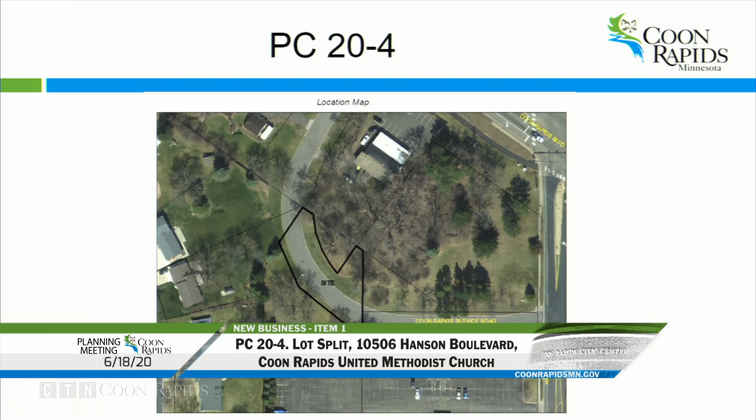Good evening, Chair and Commissioners. This is a request by the United Methodist Church for a lot split. This is the property here, highlighted or outlined in black. This is the service road for Coon Rapids Boulevard. What's being proposed is to split this property at approximately this location, with this small triangular piece being transferred to the church, and the city would then retain ownership of the remaining part of the parcel as street right-of-way for the service road.

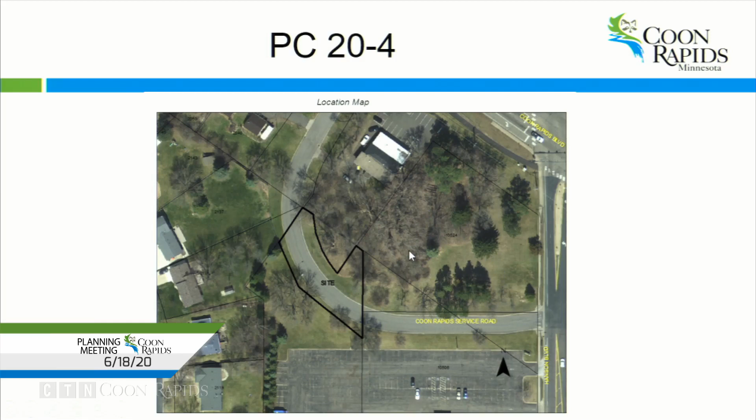Here's the lot split. As you can see, parcel B will be kept as street right-of-way, and parcel A will be transferred to the church, so they will own this piece here as well as this, and this is their main parcel down here. Parcel A will have to be combined with the adjacent parcel here. And then when this parcel does develop, part of the process will be replatting all this as one lot.

With that, I'll answer any questions. Staff is recommending that the lot split be approved with the condition that engineering comments be addressed, and parcel A be combined with the abutting United Methodist Church property.

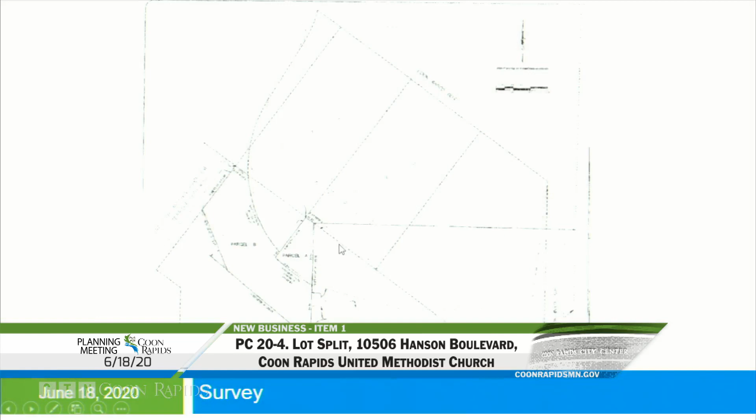Thank you, Mr. Harlicker. Commission, any questions? Commissioner Knobloch: I have a question. The 1,920 square feet from parcel A, once the plat is eventually presented and brought before the commission, will that involve park dedication fees in addition to the regular addition of square footage to taxes? Mr. Harlicker: When this larger parcel comes in to be replatted, they'll be required to pay whatever park dedication fees are applicable at that time. Okay, thank you.

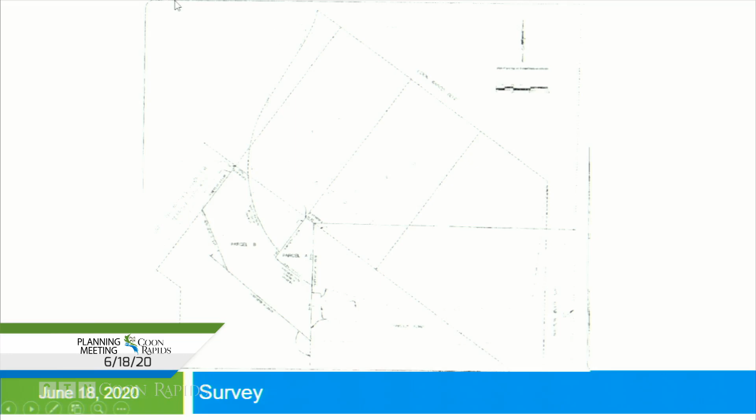Commissioner Casey: Mr. Harlicker, is there development pending in that other area that you're saying it could be attached to? Mr. Harlicker: At this point, no, but it's available. Commissioner Casey: Okay, but at some point it will get combined with that? Mr. Harlicker: Yeah. Thank you. Any other questions?

And is the petitioner present? Yes, they are. Anything they would like to add at this time?

We need to have a public hearing on this matter, so at this time I will open a public hearing in planning case 20-4, a lot split at 10506 Hanson Boulevard, Coon Rapids United Methodist Church. Anyone wish to speak at the public hearing? Seeing no one, we will close the public hearing.

We'll retain discussion by the commission. Commissioner Schmolke: In planning case 20-4, I'll make a motion to recommend approval of the proposed lot split, with the stated conditions. Seconded by Knobloch. Any further discussion? Hearing none, all in favor? Aye. Opposed? Motion is carried. This is a recommendation by the Planning Commission and a decision by the City Council at their July 7th meeting.

Yeah, I agree with that. There are not designated loading and unloading bays in the PUD. So that's the best spot for them to unload. I think with this site here, given the size, there might be a better opportunity to actually pull off and do it on site here. Maybe the applicant can speak to that too.

Okay, thank you. Any other questions for Mr. Harlicker? Mr. Chair. Commissioner Casey?

So, Mr. Harlicker, how many tenants would be possible in that building? Is it being assembled for 4 or 5? And they all have separate entrances - is that what I'm seeing?

Commissioner Casey, this elevation here shows 5 tenants. They do have the capability to provide fewer, larger tenants with the floor plan. It's really an open floor plan inside, so they've got flexibility as to how they want to split it up. And then it extends along the north edge, just around the corner - part of that is exposed as tenant space also.

This here would be this tenant here. That's the side window for this one. It's not an additional tenant space.

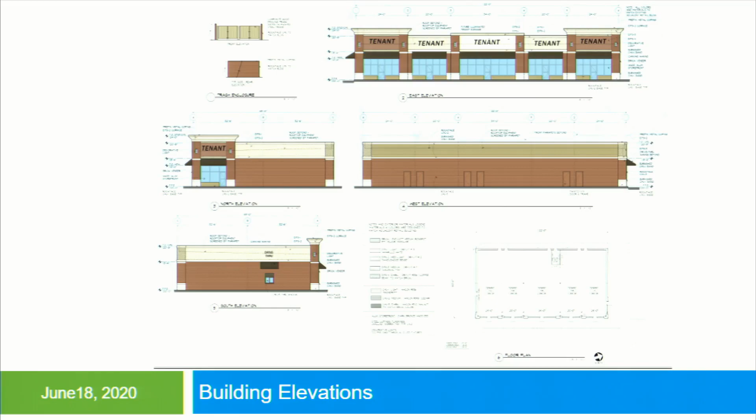Okay, then I had a question about the landscaping. Do I understand that right, that there's going to be landscaping on the west side? I'm looking at the landscaping, I didn't see it along that drive-through, the stacking space. The PUD landscaping plan does show landscaping along here, and staff is recommending that that landscaping be installed. It's not on here, but it should be added as a condition.

Condition 8. Mr. Chair, so condition 8 would be west side landscaping, additional landscaping on the west side, consistent with the PUD landscape plan.

Okay, thank you. And I drove by there this evening on my way there, and yes, there was a semi unloading right at, just to the north of Taco Bell's property, so they had it opened up, and I don't know how long they were there.

Mr. Chair, Commissioner Schmolke. Mr. Harlicker, do you mind taking us through again with the comment about the semi? Can you show us again the flow for the drive-through, how that works? The drive-through comes around this side, the north side of the building.

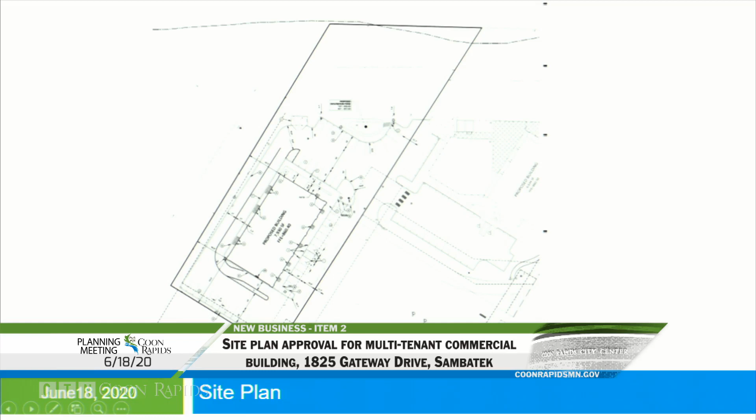And this comes out right opposite the Jimmy John's and the Holiday, and the driveway, the car wash. I don't know that you can have semis parking here and blocking the drive-through lane for a Caribou Coffee.

It's been my experience that most of the time, they're parked up here by the Holiday Station, and then actually right by the station itself. So I'm wondering, do we need to add like a no parking area there?

I mean, is there any sort of restrictions we should be requesting to help ensure that semis are not loading and offloading in that particular area? In case they hang over the exit coming out of where the drive-through would come out, would they be blocking things? So today, because they're parked across from the Jimmy John's, people can still get in and out of there.

But I'm thinking now, once we have new driveways opposite that, if they tend to hang over, or they create a blind so that traffic coming out can't see to turn right, or have to make a wide turn around, I just see it as problematic.

So I'd love to hear what the petitioner thinks about it too, but it seems to me like we should do something to say that you can't load and offload there, or park there, once this gets constructed. One option might be...

Dedicated no parking signs, correct, at strategic locations within the development. Do we add that then as another condition?

Do you have any plans of having a bike rack or anything for this building? We certainly can, I don't know if it was in the plan. Yeah, on the north side, there's a potential patio, if there were a restaurant tenant. I think it would be kind of like what's at Jimmy John's currently, there's a little bike pad and a patio next to each other, with a specific bike rack so that people lock their bikes up to the rack. Right, exactly, because I don't see it on your plan here at all. You can certainly, if that's something you wanted to add on there, that's fine. But that's the intention. Thank you.

Well, before we go any farther here, let's have our public hearing. I'll open the public hearing then for planning case 20-6, the site plan approval for the multi-tenant commercial building at 1825 Gateway Drive. Anyone wish to speak at the public hearing on this matter?

Seeing none, we'll close the public hearing.

Commissioner Schmolke, you were thinking of adding a condition? I'm trying to think about how it would be worded. How are we addressing it, so that there's a commitment from the petitioner to meet with neighboring businesses to address internal discussions around delivery traffic flow, and let that rest with the business owners. I still don't know how to word it right. In my opinion, asking them to have a conversation with no output we receive is a moot condition.

Mr. Harlicker, what are these 2 little circle-star looking things - one on the Taco Bell property and one that looks like right at the center, right on the line on the south end? Are you talking along here? Right there. I believe that's probably a light pole. Oh, all right. And these other ones? There's another one probably of the same symbol, like some sort of ornamental tree. There's another one of the same symbol on the Taco Bell corner. Yep, those are light poles. Does that designate that Japanese lilac tree?

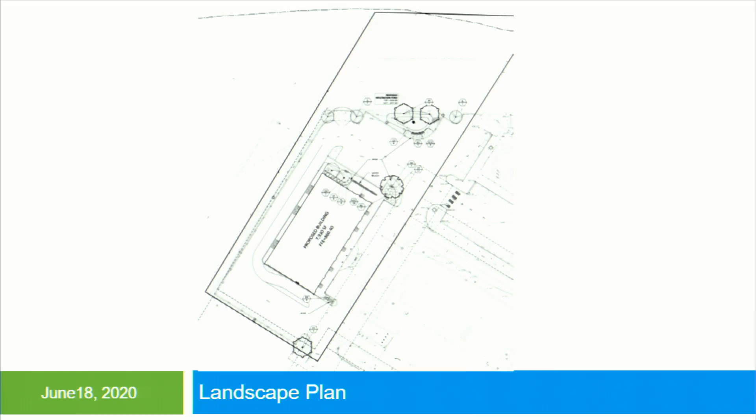Those are designated as light poles per the lighting plan. Looking at the overhead here, there's a light pole on the western curve of the Taco Bell. Actually, the pole on the south side indicated here puts us where we'll have 3 lights with the additional condition - the one on the peninsula, the one indicated on the plan, and Taco Bell has one on their property there. So there's kind of 3 decorative lights facing down. The bulk of the blank space is actually on Taco Bell's property.

I guess I wouldn't be inclined to add landscaping on the south side of this. It looks tight. Yeah, I think we missed it with Taco Bell, is probably where we're at on that. So leave that off. I would leave the south line off and just stick with the west line for the PUD. All right, and that's the condition we added.

So are we up to 8 conditions? No, we got 9 - the bike rack. I just thought the bike rack is the only one we're adding though. Well, we got number 8, the additional landscaping on the west side. Okay. And is there a particular landscaping plan that they need to follow? According to the PUD, correct? According to the PUD and as approved by staff.

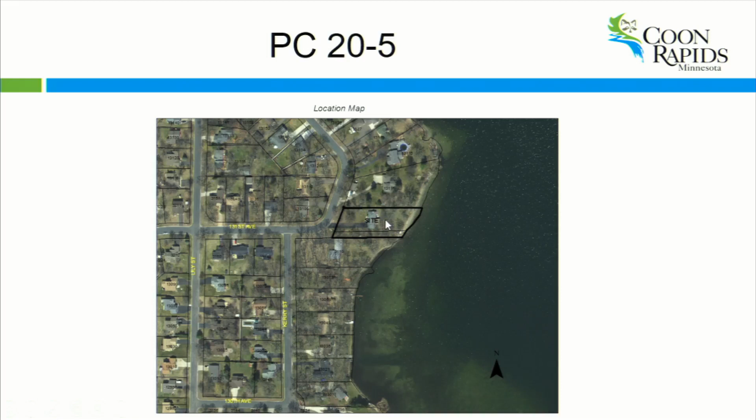Back in 2004, the two adjoining property owners petitioned the city to vacate what was half a right-of-way going through here, a street easement. The city did approve that vacation, and the property was transferred to the property to the north, the Seachies. The property owner to the south, the Martzes, have been in discussions with the Seachies, and what they're proposing to do is take that strip of vacated street easement and split it in two, with half of it being transferred to the property owner to the south, the Martzes, and the remainder staying with the current ownership.

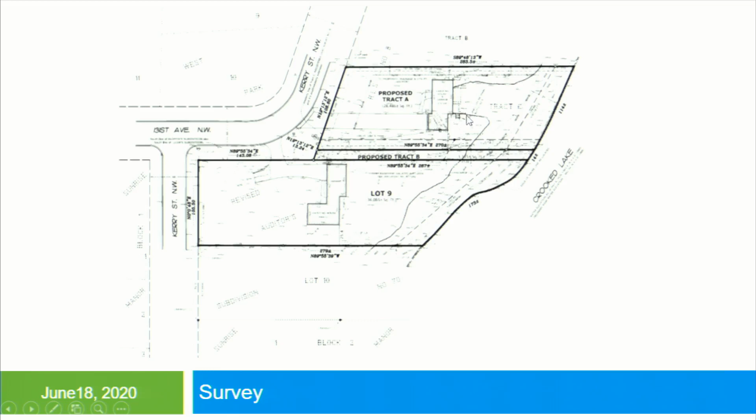Here's the survey of the property with the two houses. This, going from here up to this dash line, was the old easement. What's being proposed is the south half of that be created as Tract B, and the remainder of that, the north half, along with the existing lot, be Tract A. And here's what the registered land survey will look like. This Tract B will have to be combined with the adjoining property owner here on Lot 9.

With that, I'll answer any questions. Staff is recommending that the Planning Commission recommend approval with the condition that all engineering comments be addressed and Tract B be combined with Lot 9 to the south.

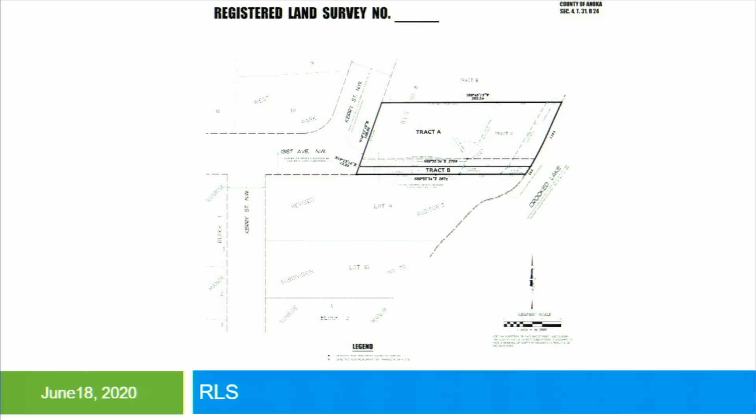Thank you, Mr. Harlicker. Commission, any questions from Mr. Harlicker? Mr. Chair, Commissioner Geisler: Mr. Harlicker, just one quick question, are both parties amenable to how this is laid out at this point? Yep, they both signed off on the application. Perfect, thank you.

Mr. Chair, Commissioner Casey: so historically, was there ever a road that went to the lake? No, there was not. Okay, never, it was potentially there, but never. Yep, and the two adjoining property owners petitioned the city to vacate it, and the city deemed they didn't need that easement anymore and vacated it. Yeah, okay, thanks. Anything else from Mr. Harlicker?

All right, at this time I will open a public hearing in planning case 20-5, a registered land survey to subdivide vacated street easement at 3110 131st Avenue. Anyone wish to speak at this public hearing? Seeing none, we will close the public hearing.

And Commission, Mr. Chair, Commissioner Casey: I'll make a motion in planning case 20-5 that we recommend approval of the proposed registered land survey with the following conditions: all engineering comments be addressed and Tract B be combined with Lot 9 to the south. Second. Motion by Casey, second by Geisler.

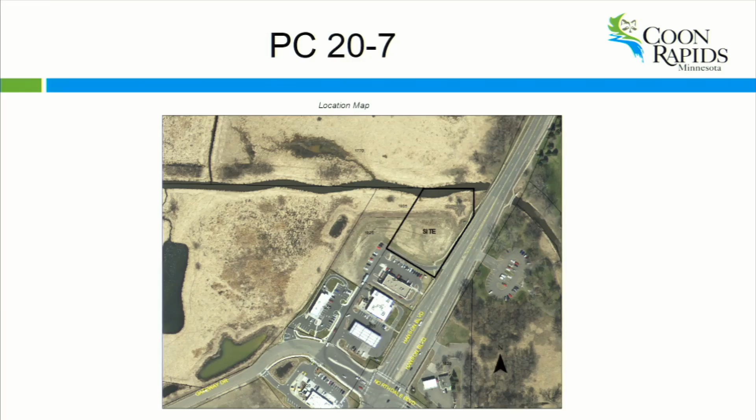And our next case, planning case 20-7, site plan for New Creations Childcare at 1805 Gateway Drive, Rylaur LLC. Mr. Harlicker: Chair Schwartz and Commissioners, this is the site here, the one we just looked at for the multi-tenant building. They're proposing a two-story childcare center. This is the site plan.

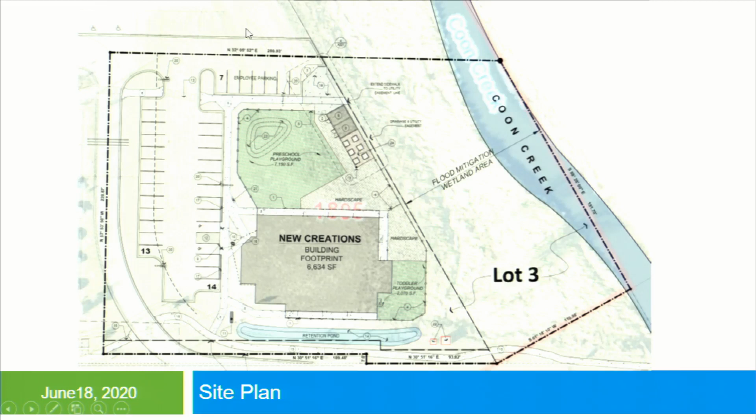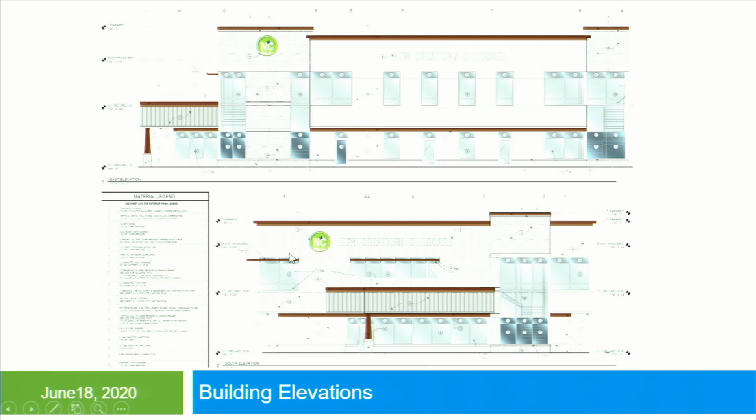Building elevations, it's a mix of materials. This is the east elevation, so this is what faces Hanson Boulevard. This is the south with the main entrance area here, facing the Jimmy John's Taco Bell site. And this is the west elevation that faces the proposed multi-tenant. And this would be the rear of the building that faces Coon Creek.

This shows up a little bit better the materials. You've got the brick and stone that match the other buildings in the development. You've got gray Hardie plank siding here, and then an architectural metal piece that covers the entry atrium into the project, as well as provides an outdoor space up above.

This is looking at it from Hanson Boulevard, looking to the northwest, I would say. This is another perspective, looking at it more from over by the Jimmy John's corner of the building. Again, you've got the brick base that wraps around it, and the stone on the columns with the Hardie plank siding.

Here's the materials that are being proposed. You've got the stone and brick, and you've got the Hardie plank siding, the metal panels along here, and then the other aluminum across the top of the buildings and decorative around the windows.

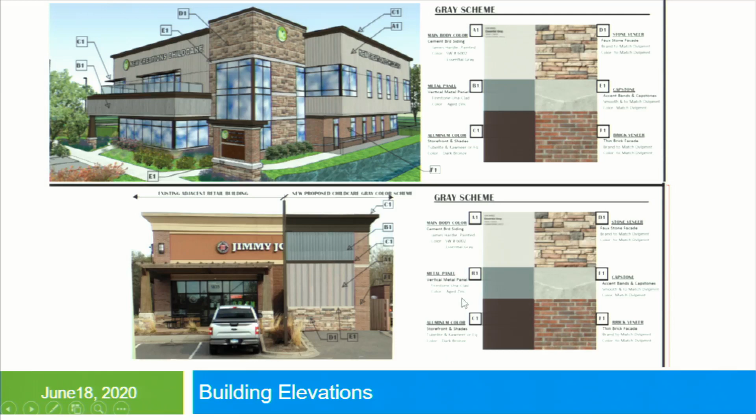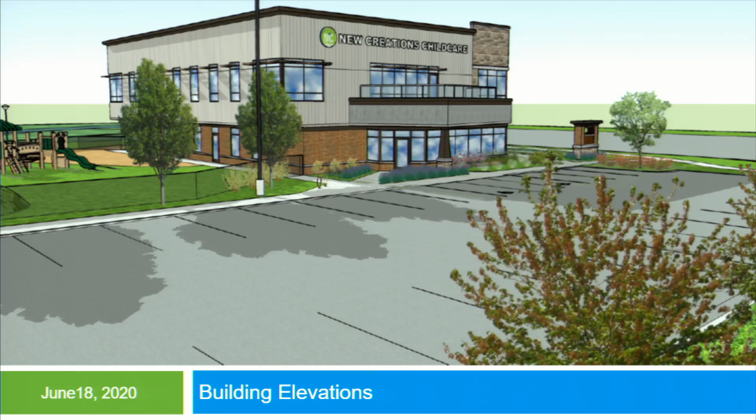With that, I'll answer any questions. The applicant is in the audience also, and he can go into a little more detail about the actual operations of the daycare center, as well as the architectural design and materials.

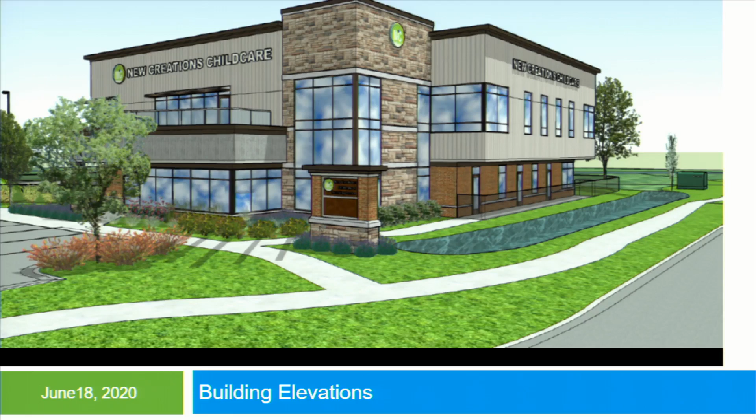Then I guess my question would be, and I don't know if it's for you or the developer — the top half is obviously for your new creations, childcare. The bottom, are you going to list 5 businesses in that small space? No, I don't think it would be clear enough to put 5 names in there. So it's likely that we'll have a larger tenant in the building and not 5 tenants. That's what my thought is.

So the larger tenant would get access to that monument sign. It's more of a preference for somebody in the building you reviewed earlier. All right, I just wanted to make sure the sign wouldn't enlarge because of having so many more tenants there. No, right, no. All right, thank you.

Mr. Chair, Commissioner Casey, I have one more question. We talked about semis and all kinds of delivery trucks. Your facility gets a catered meal — is it 5 days a week that you're open? Yes. So what kind of a truck delivers your catered meals?

I'm Ryan Carlson. We actually make the food for all of our locations at a central site in Blaine, and then it's delivered by minivan to the locations 3 days a week. Okay, how come 3? Because 2 of the days are cold days, so those are delivered within the other days. That makes sense. Yep, and they're actually delivered prior to us opening for the day. Okay, thank you.

Yes, right by where that crosswalk is, actually, where number 8 — probably put it behind that. Right, behind, exactly, but in that proximity, right? Yep, so maybe in the proximity of the sidewalk at — or you could say east of the crosswalk, between the Caribou and the New Creations property. The way I wrote it down was: stop sign on drive-in roadway prior to driveway entrance.

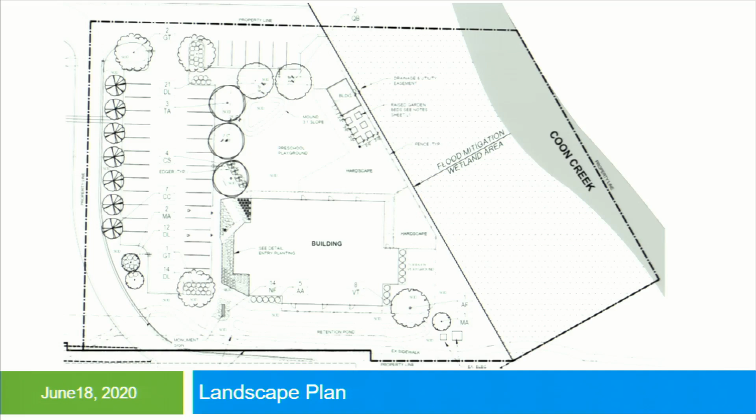Perfect, that works. You get to make the motion. No, I know, it still doesn't work. So prior to the what, did you say prior to driveway entrance?

But along this road, right? So again, we're not looking for the drive-in in the roadway. We'll get it in the right place. Don't worry.

Okay. Anyone willing to go with a motion? I have it open. Do you have it all written down, Mary? I do, I think.

Mr. Chair, Commissioner Schmolke: in planning case 20-7, we recommend approval of the proposed site plan with the following conditions: all engineer comments be addressed, all Anoka County Highway Department comments be addressed, a site security agreement be entered into with the city, all signs require separate permits, a crosswalk be installed where the Hanson Boulevard sidewalk crosses the right-in access, light fixtures must be consistent with the style established in the PUD, and a decorative fixture be placed where the building sidewalk intersects the Hanson Boulevard sidewalk and where the Hanson Boulevard sidewalk crosses the right-in access.

And then the addition of two more conditions: the first being condition number 8, the addition of a stop sign along the driveway prior to the right turn into the New Creations entrance. And then, prior to the issuance of permits, they must receive watershed sign-off and approval.